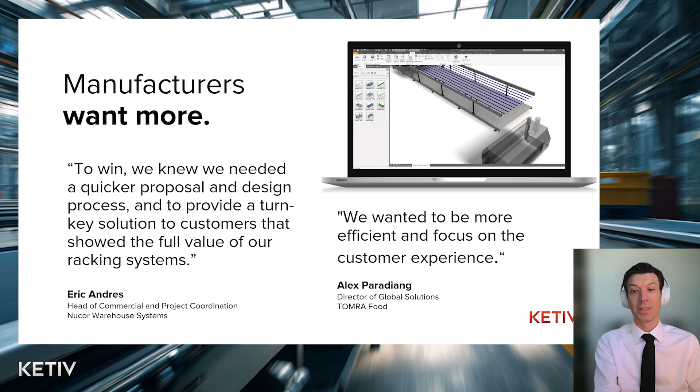That's one of the biggest things we've seen with some of our past and current material handling system providers, is they have dedicated customers. Whether that's in order to get as much out of them as possible, providing them the best solution so they don't have to go try to supplement from others, because these turnaround times are longer than they really need to be. Or in some cases, they're trying to get some bigger customers. They've got so much potential there, but they just don't have the throughput available for it.

So here we can kind of see the typical workflow that results from trying to deal with all these problems and get things moving as quickly as possible. So, you start with a customer identifies a need. They need a rack or conveyor or a mezzanine, and they're going to interact with somebody, whether that's a salesperson or an integration partner or an engineer. They're going to contact somebody and tell them what their needs are, and they're typically talking about the conveyor specifics, the design aspects.

Then you've got this point in which, usually in order to try and come up with this price, we're either not doing a cost plus pricing and capturing our true cost, but instead doing some sort of length versus width multiplier type situation, or identifying some previously similar situation and using that as a best guess estimate. So ultimately we estimate this price.

We'll obtain the order and funds, and then at that point engineering will really start to get involved. Get that facility in CAD, whatever system that is, start putting in those things and trying to make them fit.

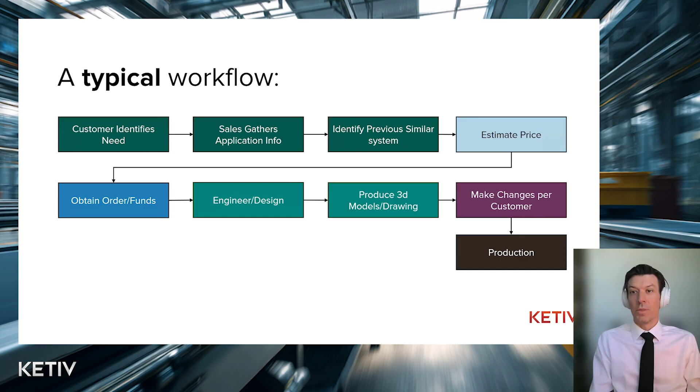And then ultimately that can backfeed, because we didn't capture the true cost. But then when we go to quote again, we're kind of using this previous one as a measure, whether that's to come up with that length width multiplier, or grabbing that similar system and then trying to do some adjustments and markups. We're compounding those losses and errors in a sense.

And so, these are where these drawbacks really come in. One of the biggest ones is we're bottlenecked. So many people come to us because they've tried other systems, they've tried these different situations, and they've come to the realization that this is not working. We've hit a kind of a limit that we can't get beyond, and it's really inhibiting the growth of the company and the business.

Then the easy answer sounds like, hey, we'll just get more engineers. But there's such a high learning curve that really isn't a scalable solution. And not only that, but you bring in somebody new, that's now taking away time from an experienced engineer to teach them, so you end up with an initial hit instead of gains.

And those hits can go for months. I've heard situations where it's like, best case scenario, if I really dedicate myself as an engineer to a new guy, I could probably get them producing on their own in 6 months. Well, that also means 6 months of not being able to produce themselves while they're spending all this time teaching.

Procurement and manufacturing planning, that becomes a big issue, particularly when there's desire to become more efficient, whether that's to have more on-the-shelf items that can be pulled from on a regular basis, to make predictions and go, okay, we've got this big order coming in and we know we're going to need these things. And even to make predictions off of what has not been officially ordered, just looking at what is going on right now in the before-quote and complete-quote-and-acceptance process, and prepare for that. All these things can result in reducing your cost on parts themselves, as well as labor costs, by having that right there and accessible.

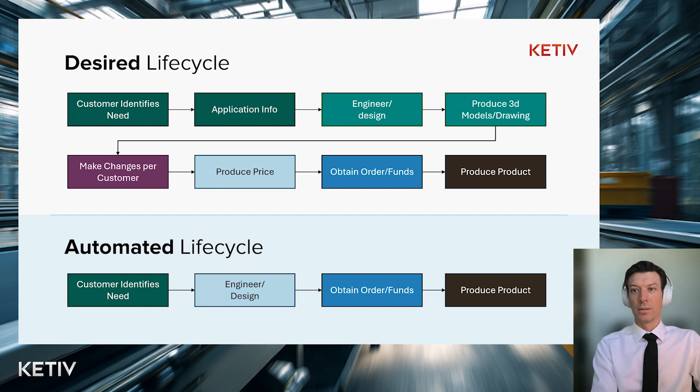So we're going to hop into our demo real quick. We'll start with the typical process to configure a standard order, then look at how CAD and bills of materials can be generated. After that, we'll look at the custom CAD solution we can provide, how that's done on the front end and delivered directly to your integration partners and customers, and how that interacts with the complete facility layout.

We're going to start at parkerlifts.com. It's a fictitious company, but the point is this is a website accessible to you or anyone else today, and you can do the same thing - providing integration partners the ability to log in to your website, as I've done here, and begin to configure. They have a shopping cart, or we can call it a project, and we'll look at that here.

In this cart, we can see any previous shopping carts we have. We'll go into one specifically and see a product - of course you could have multiple products, like multiple conveyors, mezzanines, whatever. We'll look at the configurator. The real point here is that all this is easily accessible to your customers and partners so they can do these things themselves.

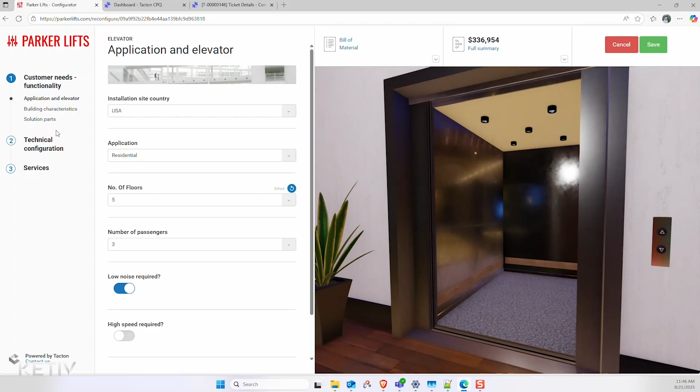We've got a visualization here, a 3D model that loads and gives live results based on any changes. They can work through this in any order they want - this solution provides the ability to not work linearly. As we make changes, we have some options, and we can actually manipulate things directly in the visualization interface and see the immediate results.

This is one of the key areas that provides the customer confidence that's needed. We also have the ability to optimize - based on lowest price, highest uptime, or power consumption to get the most eco-friendly version. But this still ensures compliance to the customer's needs, whatever they've selected, and any industry or engineering standards, while specializing within those options to meet their specific needs. They could ultimately request a quote, and all this provides the confidence we're ultimately trying to give that customer.

Now, of course, at this point we don't quite have the CAD solution yet - we'll get there. But here we can see the key is that connected process. We've got information that has come from the website directly into CPQ, and in that CPQ area, we can manage it and move it through our different workflows.

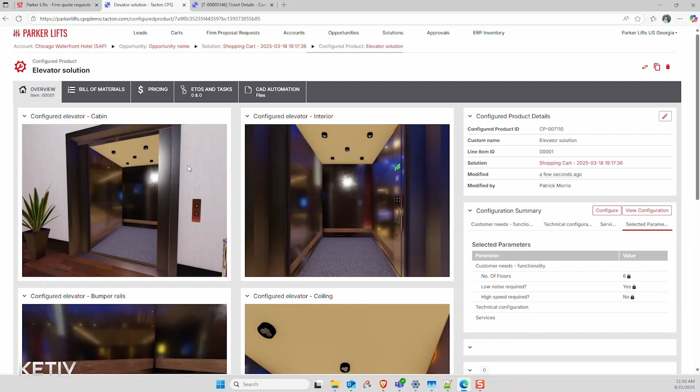We can see we have CAD automation that will generate that CAD information - it gives us back a bill of materials, and it gives us back files that can be downloaded. Those files can be immediately generated from the website even, provided as a zip, and downloaded. The customer could then place those into their facility if they wanted, and of course, these are highly detailed CAD models.

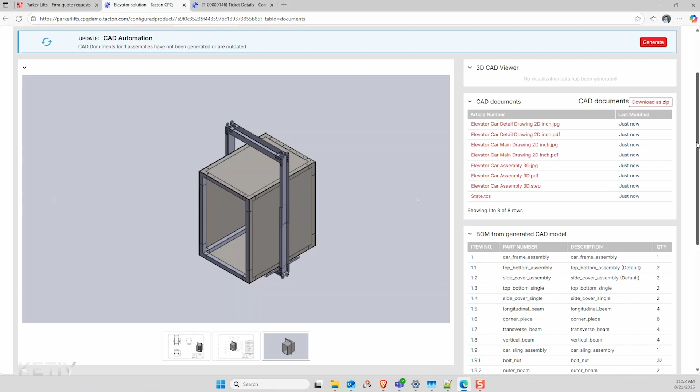And then all the information can be put onto a quote document, and all those drawings ultimately feed through the process to your manufacturing. The CAD system could feed through Vault, feed into the ERP, populate parts and things that you haven't built before, but we can get them into the ERP automatically as a part of this process.

And through that, we have a full connected workflow from the web page to Tacton, or in this case Tactons, but from the web page to CPQ to the CRM system to the ERP system, so that we can produce those prices and all the way through to manufacturing, right?

A complete connected system. You can see here we can manage that workflow process, ensuring that standards are followed as far as the workflow goes, that things are done in the proper order. And not only does it make it easier to follow that proper order, but it actually reduces the time it takes to do that, right?

We get automatic notifications as we go through this process through simple button clicks. The next person in line will get notified that they have things to do here, what their process is. For instance, procurement, maybe they need to go source something, those types of things.

But now we're going to hop into a conveyor-specific solution. We're going to look at one of the methods that we can utilize to place things into our facility, okay? And we can upload a 2D layout that could be a PDF, an image, a CAD file, and we can scale that.

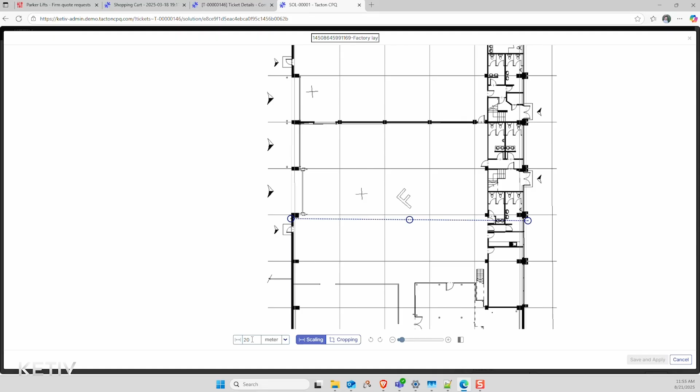And then we'll go into an existing conveyor here and just kind of look at how this works. And so we have our visualization of our conveyor. We can look at it, so forth, make changes if we want to. Those changes would be depicted live, but I'm just going to leave things the way they are. We have calculated horsepowers being selected automatically for us based upon our product.

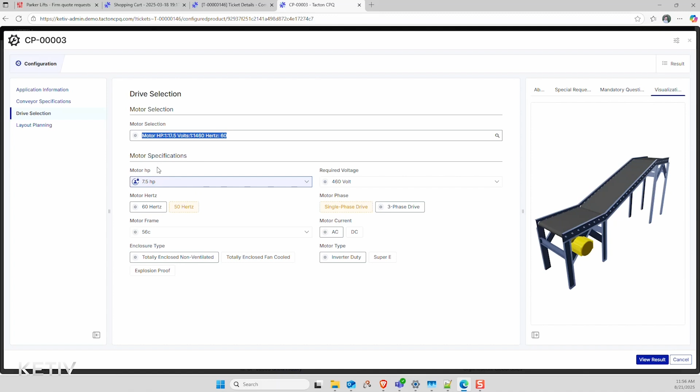But here we'll go to the layout. We can see we now have this 3D model overlaid on top of our facility. So I can move that around, make sure my spacing is going to work, and everything's going to fit.

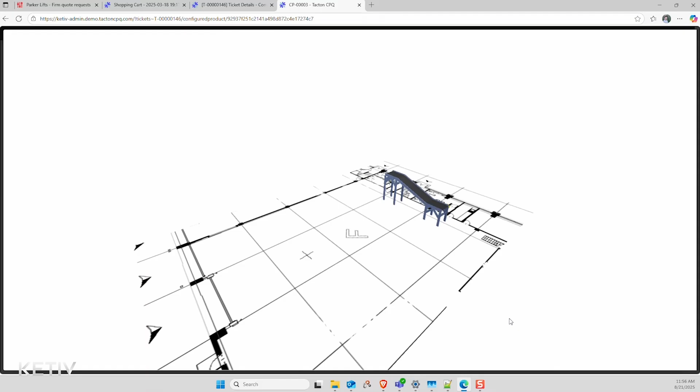Ultimately, we could have multiple conveyors here, so you could build out a line of conveyors and make sure we're not going to have any unnecessary intersections and that type of thing.

And the advantage here is that this is all available in such a way that this could even be run on a phone. You could use the visualization to even use augmented reality, be in the facility itself, place the 3D model through augmented reality on your phone or tablet, and walk around it and see it in the actual environment and make sure there's proper space there, right?

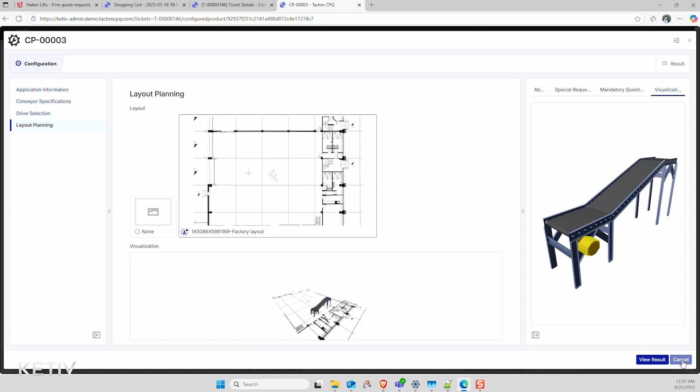But with all that, we have all these extra abilities, but then KETIV, we've come up with an additional piece that really nobody else that I'm aware of can provide, because we've got the skills for custom automation directly in Inventor, and with our CPQ API experience and integration experience, we can connect these two for a seamless experience that can be utilized as a part of the design and configure quote process.

So here in Inventor, I've got a couple machines that are sitting here that I need to connect via a conveyor. And I want to make sure, I've got to make sure the conveyor I get, I want to have full confidence that this is going to fit and work in this specific situation.

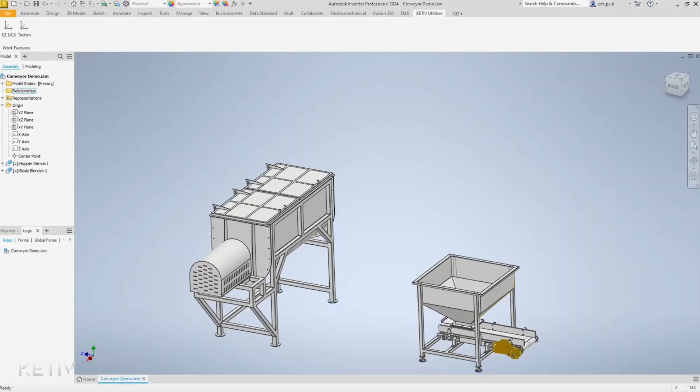And so we have this built-in utility directly in the interface of Inventor, and that's going to bring up the CPQ interface in an Inventor-specific window. I'm going to pull this across here so we can see it.

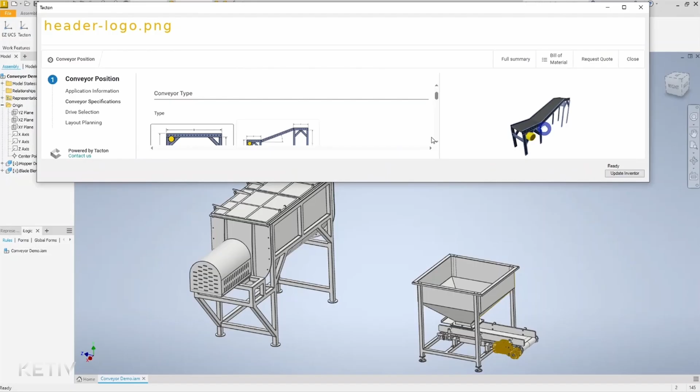And so we can, once again, configure like we saw earlier, make changes. We still have the visualization to give us that quick, obvious feedback, right? But that visualization is not CAD, so I can hit update, and it's going to inject that information into the CAD system and give us full, solid, parametric 3D models.

And I can ensure, so we can see here, okay, obviously this does not fit the way I want, so I can make those changes, and I know what those changes are to get it to fit. And now I can see, I know it's going to fit.

If I have a truly custom situation that requires modifications to connect two machines that have never been connected before, I have 100% accurate 3D models to do it with. I don't have to produce 3D models just to figure out my special bracket, I've got them right here. I can make those adjustments before we get past quoting and find out the whole conveyor has to change to accommodate these brackets. Whether it's an internal engineer or the customer doing it, they can clearly see the need and make a request to you and your engineers to come up with that bracket system.

That is the major game changer that we at KETIV provide: the ability to have a design process directly in CAD to place these things in your facility, move them around, identify all the needs, and meet those needs in a much quicker, more efficient process. This allows your sales guys to be salesmen, not engineers, and allows your engineers to not just produce monotonous automated drawings but to handle custom situations.

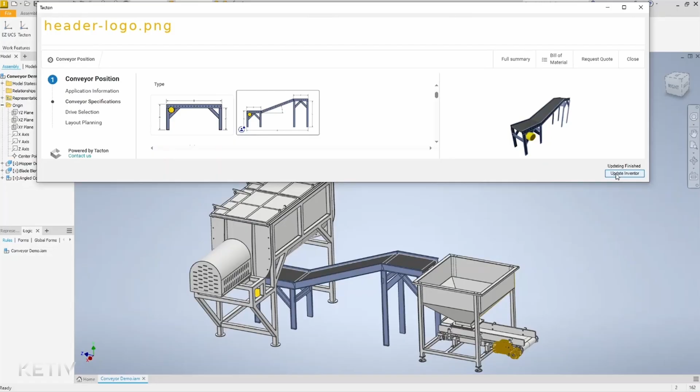So the key in all this that we've shown with this demo is that KETIV was able to come up with this solution, and it's a unique solution within the market. That ability to do CAD as a part, within a facility, and get live results as part of the configure price quote process, with all these systems connected to feed directly into the ERP system, the CRM system, moving all the way from first customer interaction on a web page to providing the manufacturer their drawings and procurement information, with a complete automated connected system, is something you get with us.

Instead of having to go to one vendor and get a piece, then another vendor, and another, and then try to find a vendor to connect these, where they don't really understand either part of the system or what your total overall goal is - with KETIV, we can handle it all. This has become a typical thing that we do: we'll look at your processes, find out what's going to be the best situation, set up the systems to meet those goals, and implement it.